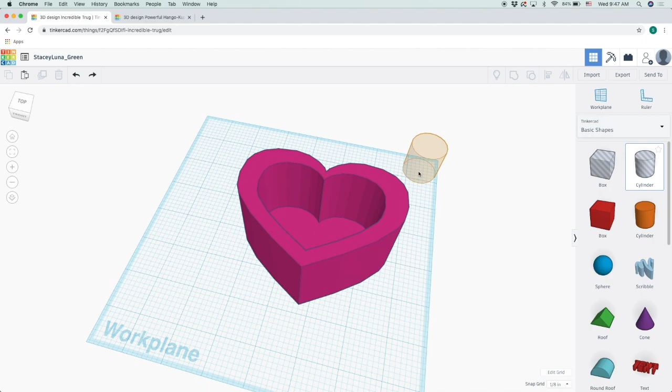This is my planter here and I want to add on the hole. Now we gave you girls the dimensions of the hole to be 0.5 inches, half an inch. Okay, and then the height just depends on how much base thickness you have.

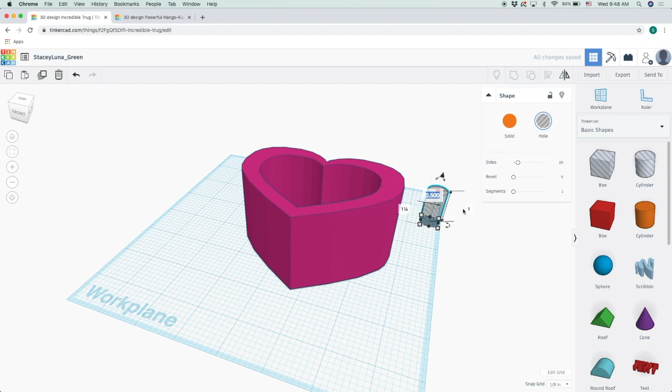So for mine, my thickness is pretty standard at 1/4, and I'll show you what that means. I'm going to merge it onto the center. Good. So now you'll see that the height of it is 1 inch, which is enough for my planter because my planter is not 1 inch thickness of base.

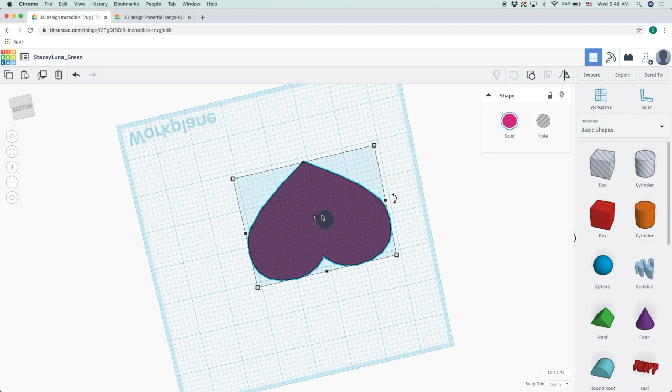So I'm just going to merge it and see that it comes out through the bottom, and that's what we want. So now I just want to center it. So I want to highlight everything, click align. This will center it here and center it here.

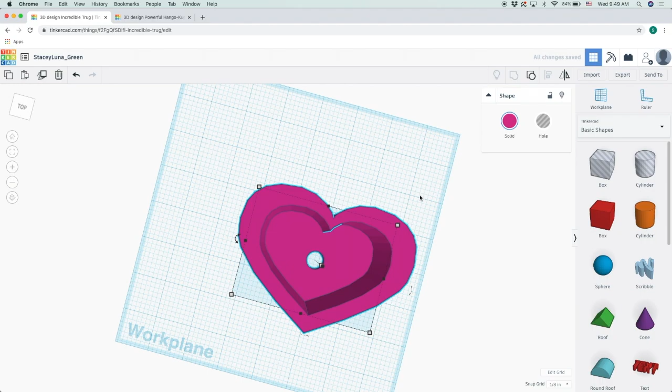And now I can highlight everything and merge. By merge I mean group, right? And now I have a drainage hole. So the 1/4 of base that I was talking about is how thick this base is, right? So it's 1/4 of an inch, okay?

Now there will be cases where there are different types of designs that you will be required to extend the height of the drainage hole. So let me show you what I mean.

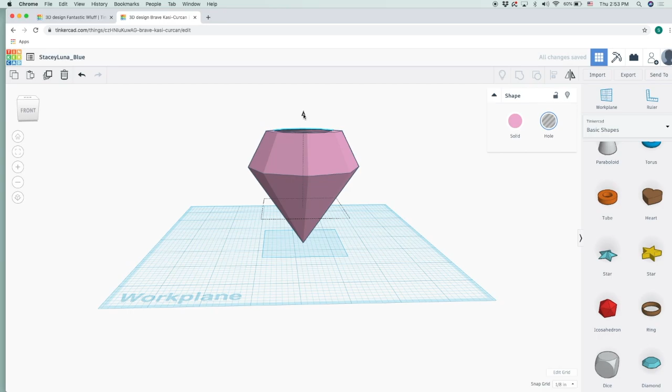We have this planter here that is set at 3 inches. Now its deepness is 2 inches. That tells us that all of this under this line, okay, which is 1 inch, and it will tell you just by clicking on the cone. So let's try to get it to show. Oh, there it is. So it's 1 inch, right?

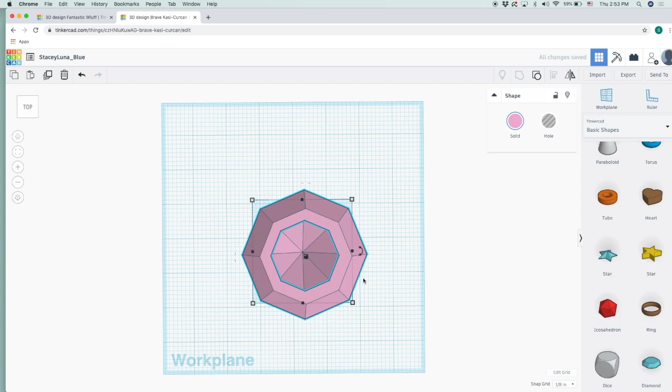So all this 1 inch is considered a solid. So once you group that together, it goes deep, but it's only going in deep 2 inches of the whole planter. That means that once I chop off the bottom, which you should do as you don't want your diamond to tilt,

play with the dimensions. So we want it at 3 inches, and I'm going to be chopping off only half of it. That means that I will extend my height to 3.5 to account for that half that I'm chopping off.

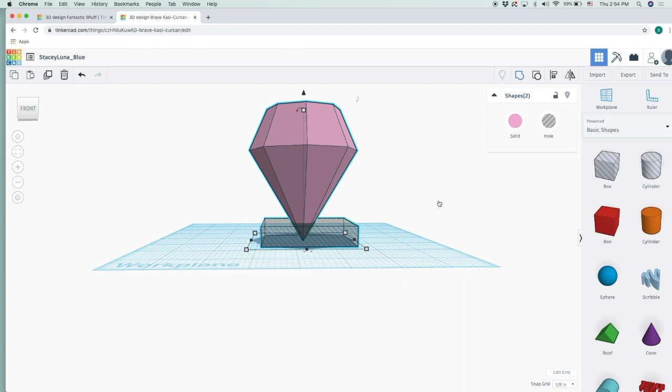Okay, so once I do that and I group it, I have a base. Again, okay, I do have solid inside. I took off half, so now there's only half of it inside that is solid. So I want to go ahead and add the drainage hole.

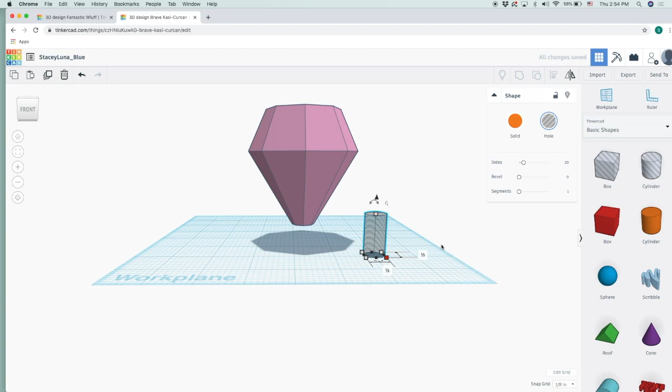I'll set it to 0.5 like we did with the other ones. This one in particular, the 1 inch, let's extend it higher just for safety. However, because we do have half an inch, the 1 inch will suffice. But let's just work with it and see how that works.

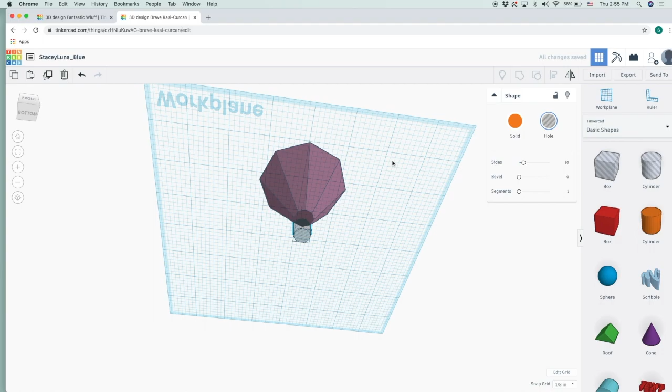We have 1/2 inch. Once it's set under, you're able to just highlight everything and align it. Okay, highlight everything using these dots, align it, and it will center it. See how it's not even coming up?

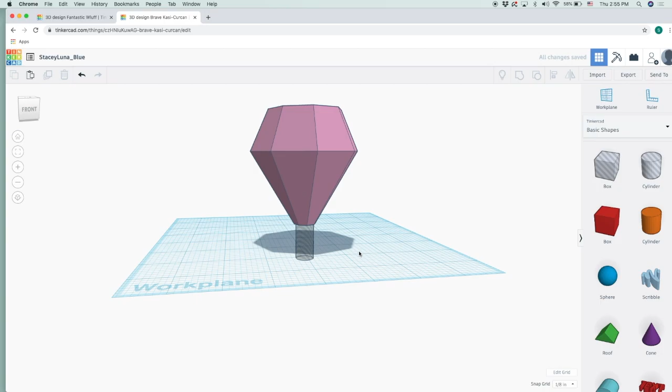What you're gonna have to do is you're gonna have to raise it up higher. Oh, and there it is. It comes out through the top. So now that that's good, see how it's a little bit, how it's touching the edges?

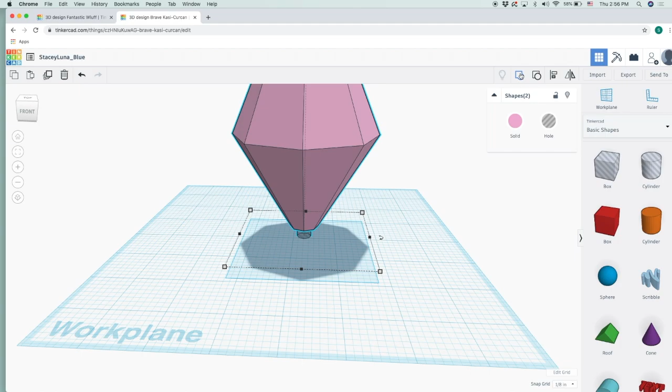We don't want that. So we are gonna have to scale down this drainage hole smaller. So let's set it at 0.3. Yep, that looks good. Now grab everything, center it. Awesome. So now I'm able to highlight everything and group, and I have myself a drainage hole.

Now, if you saw it with the heart, it was 1/4 of an inch thickness of base, and this one is more, which I believe it was half, right? Because we took off half. So there you have it.